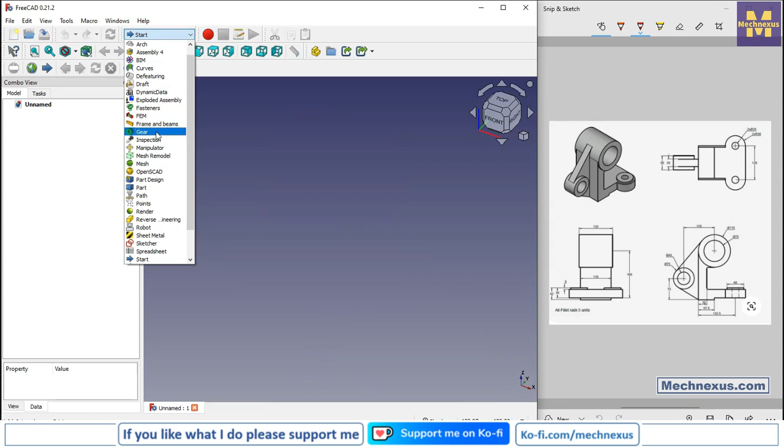So let's come back to our tutorial. Here I have created a new file, and I will switch to the Part Design workbench, create a body, and then click on create sketch. The first thing I will do is create this circular profile.

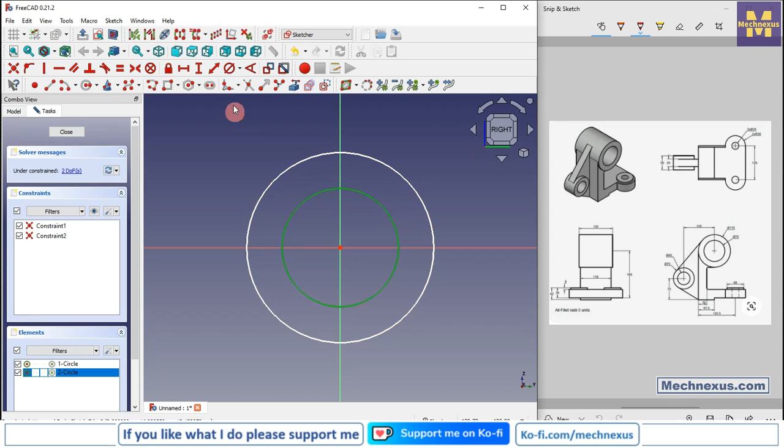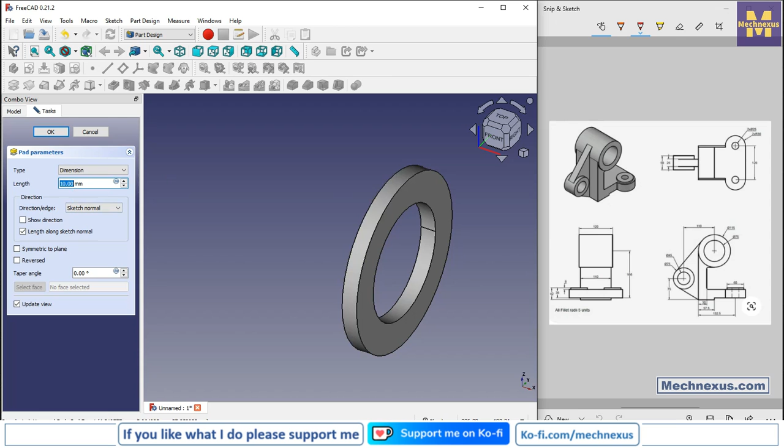For this I will select the right plane and create two circles. Select the circles and provide the dimensions: the inner one is 75, so select diameter and provide 75, and again select diameter and provide the outer one 115. Let's move the dimensions, and now I will close my profile and create an extrusion, providing a length of 120, symmetric to the plane, and click OK.

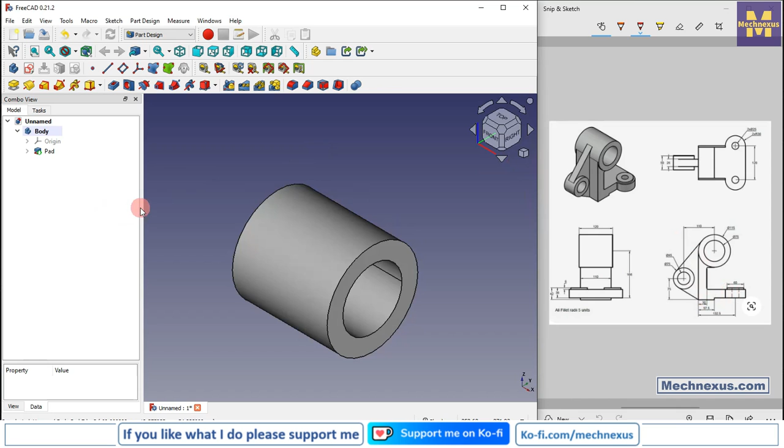Now we will create this L-shaped profile which we can see here in the side view. We will switch our model to isometric, turn on visibility, select the right plane, select this mid plane, and click on sketch. We go to the model tab and hide the origin plane, then switch to wireframe view.

The first thing we will do is project the outer diameter, and here I will create an L-shaped profile. I will delete this, and again create a rectangle, and delete these two lines.

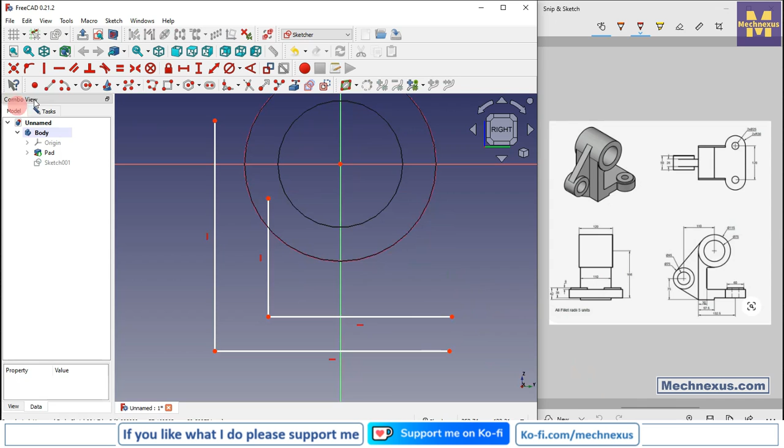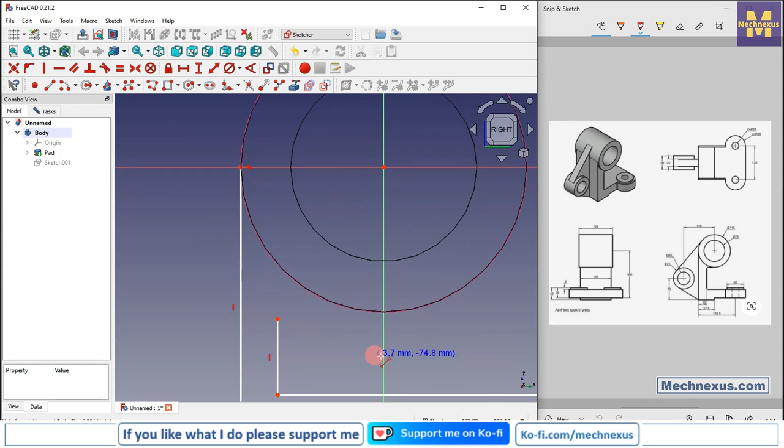Now I will select the line tool, create a vertical line and make it vertical. Here I will select this and this, move it a little bit, select this and this, and add a tangency. Select the trim tool and trim it, and here I will create a line.

Let's see what is the conflict, and delete it. I will create a line, and now make this line tangent. Use the trim tool to trim it, and now give the dimensions.

Delete it. Here we are seeing the vertical constraint, so we will select vertical and set it to 172. Select this horizontal and give it 150.5, and select this and provide a dimension of 42, which we can see here.

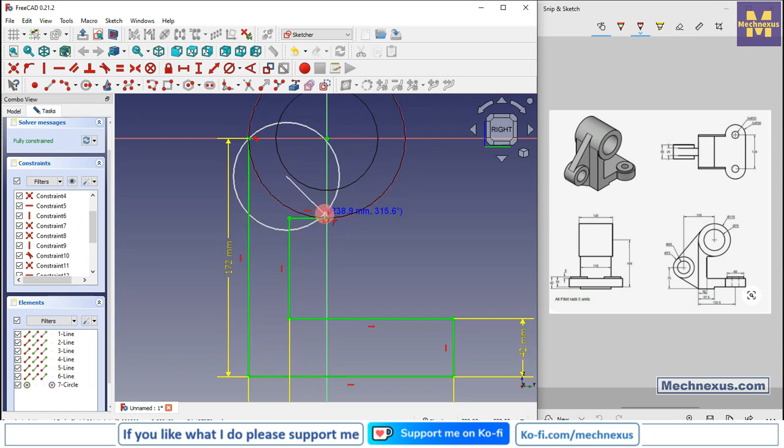We will select this point and this point and add a horizontal dimension of 30. Here we will create a 3-point arc which will be equal to our projected diameter, and select this to make it equal.

So this is our fully constrained profile, and we will extrude it to a distance of 110. We come out of the sketch, press V7 for shaded view, select the sketch and click extrude, provide the distance of 110, keep it symmetric to the plane, and click OK.

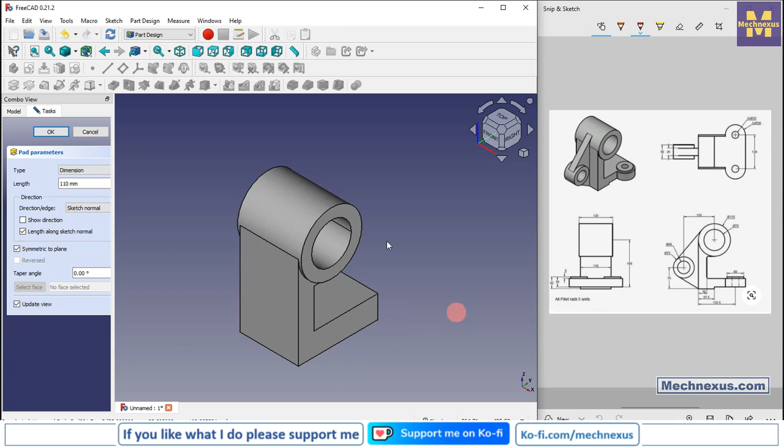Now we will create this half circle. I will select the face and click on sketch, switch to isometric, click project geometry, go to top view, and switch to wireframe.

We will create a 3-point arc, select this point and this line and add a coincidence, select radius and provide a radius of 36, and now select the line and close the profile.

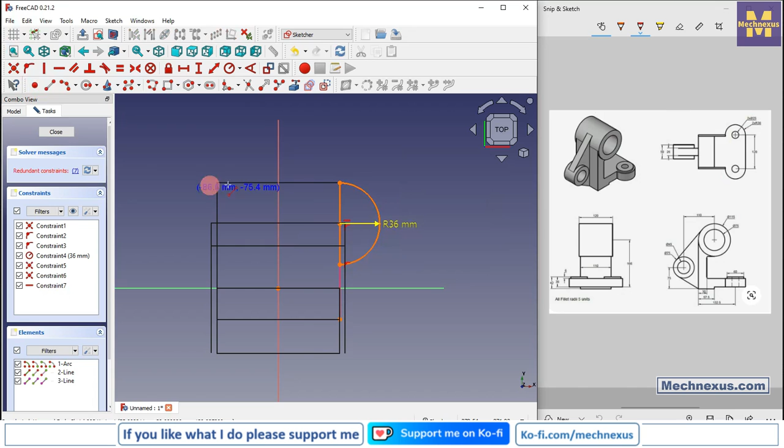Here we will delete this conflict constraint, close it, and press V7 for shaded view. You can see all the shortcuts here - for flat line it's V7. We select the sketch and click extrude. From here we select reverse, then select up to face, and select this bottom face.

Now this and this seem to be separate solids, so we will refine the shape by clicking last features and setting refine to true. Now we will mirror this on the other side by clicking mirror, then select reference, select this mid plane, and click OK. This mirror feature also seems to be a separate solid, so we refine it, setting it to true. Now you can see these two have been successfully merged.

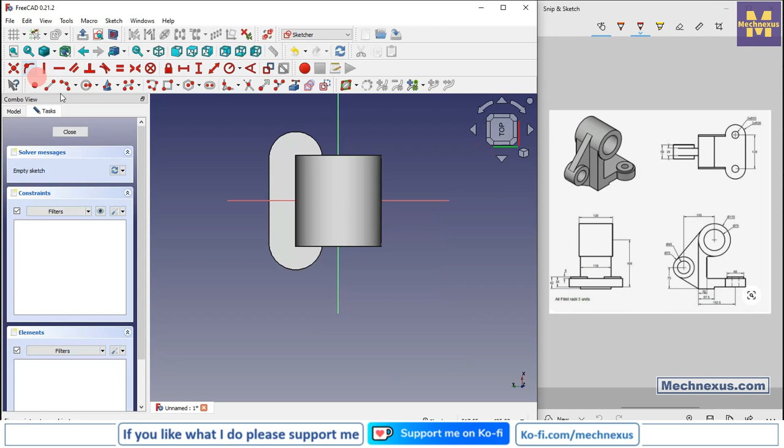Now we will create these two bosses. We switch to isometric, select the face, click on sketch, switch to isometric, click project geometry, and project it - this is a diameter of 60, which we can see here. We go to top view, switch to wireframe, click circles, create a circle, go to diameter and provide 60, then click OK.

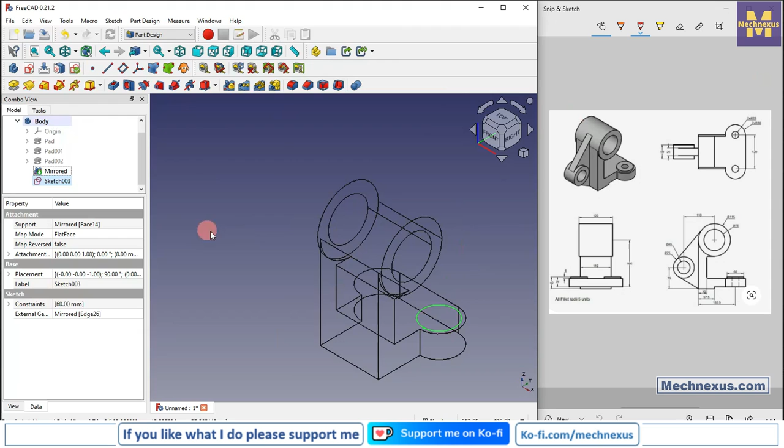We will also create on the other side, click on project geometry, create a circle, and make this and this equal, click on close, press V7, select the sketch, click on extrude, and this is the extrusion of 6 mm, click on OK.

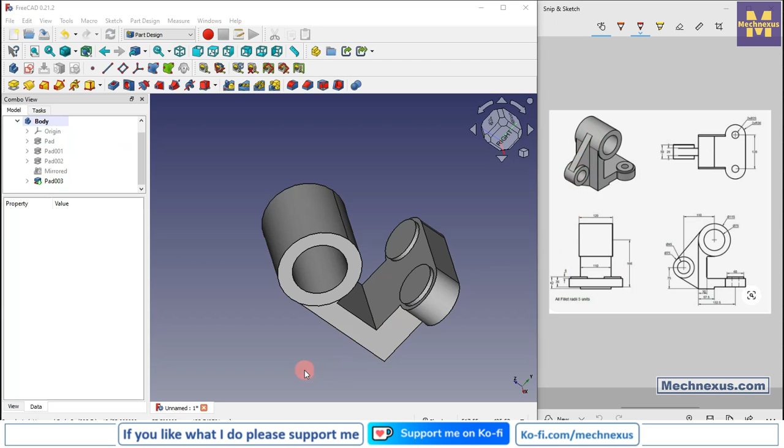Now we will create this rib. For this we will select our mid plane, so we will select the origin plane and press spacebar, select the sketch, switch to the model tab and toggle the visibility, switch to the wireframe and click on project geometry, project it.

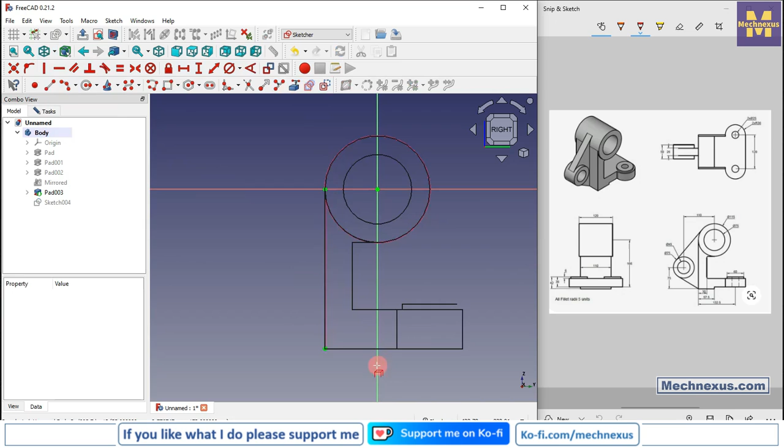We will select the line tool and create a line, select a fillet and provide the fillet here, select this arc and this line and provide the tangency, select the trim tool to trim it, and this is of diameter 75.

From this point to this point the distance is 75, and the horizontal dimension of the center from this to this is 110. Our sketch is fully constrained. The only thing remaining is our profile is not closed, so we will close it.

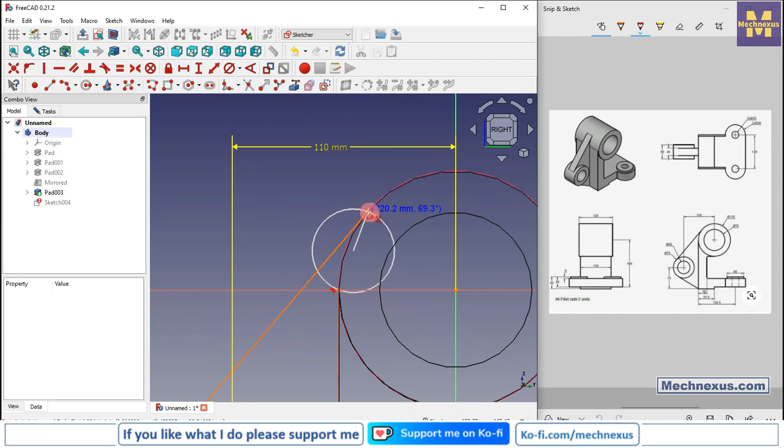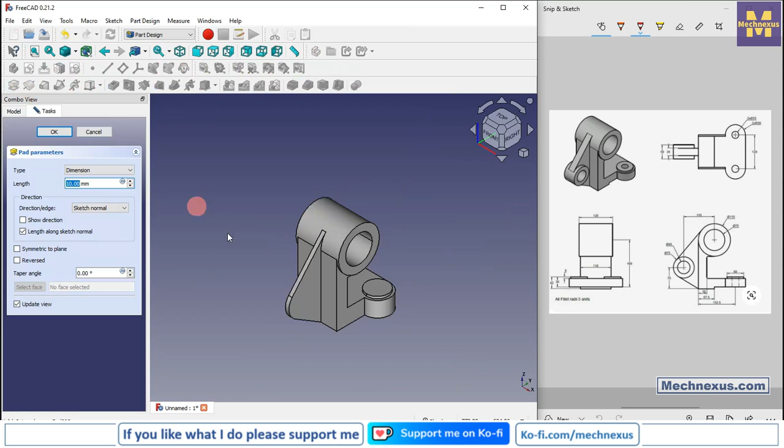Click on close, press V7 for the shaded view, select the sketch, click on extrude, and this is of 26 mm thickness, and from here we will select symmetric to the plane and click on OK.

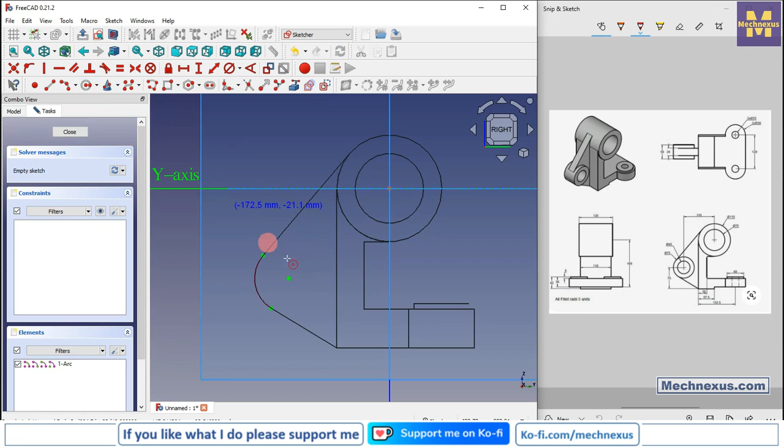Now we wanted to create this circular profile, so on our plane we again select the right plane and click on the sketch, switch to the wireframe and click on project geometry, select the circle tool and create an equal circle, and we will extrude it to a distance of 50 mm.

First we will turn off the origin plane, press spacebar and press V7 for the shaded view, select the sketch, click on extrude and provide the 50 mm, select symmetric to the plane, click on OK. Here we are seeing separate edges, so obviously we will refine our features, set refine to true.

Now we will create the hole. The first hole we will create here. We will select the face and click on the sketch, click on project geometry, select the circle and create a circle of 45, select diameter and provide it 45, click on close, select the sketch, click on extrude, and from here say through all, say OK.

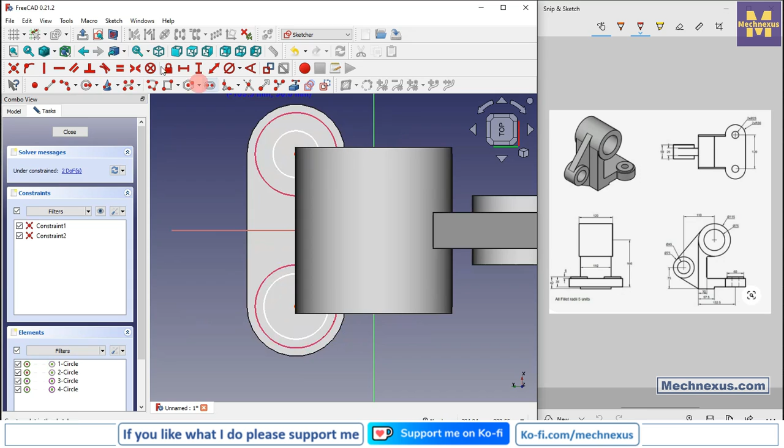Now we will create these two holes. For this we will select the face and click on the sketch, click on project geometry and create a circle of 25 mm. If you are facing any difficulty switch to the wireframe view, select diameter and provide a diameter of 25, select this and make it equal, click on close, press V7, select sketch, click on extrude and from here say through all.

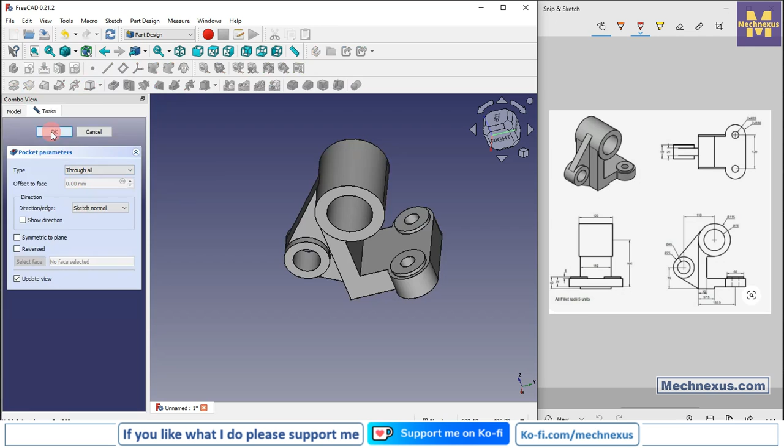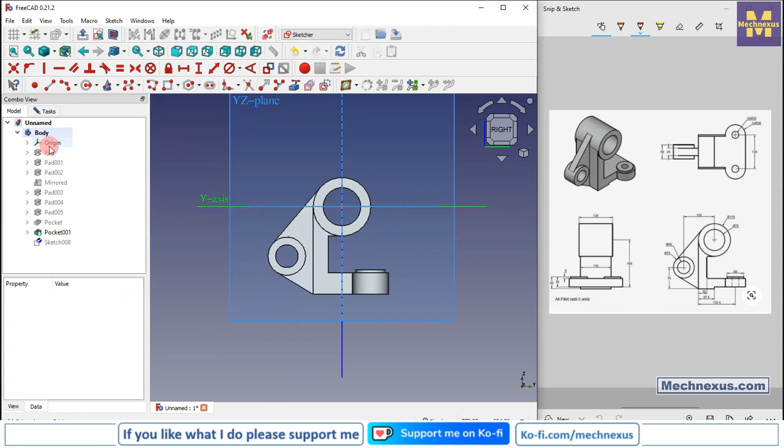Now press 0 for isometric, and here we have a cut at the bottom side. For this we will go on our origin plane, again select the right plane, click on the sketch, switch to the wireframe, click on project geometry and project these two edges, and create a rectangle, select it and provide the vertical dimension of 6 mm.

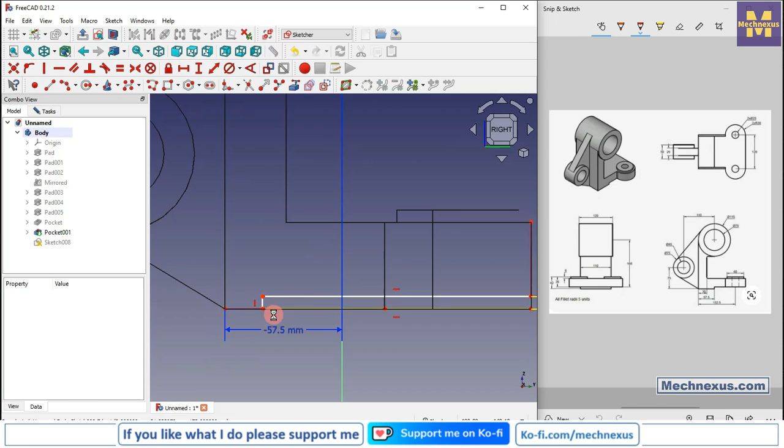We will also project this edge, select this point and provide the horizontal dimension, select this and this, and this is of 57.5, click on close, press V7.

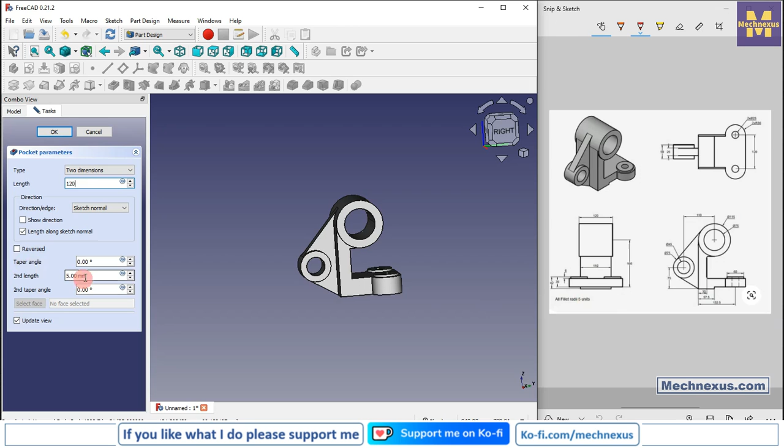Select sketch, click on extrude cut, and from here select 2 dimension and set it to through all, symmetric to the plane. You can see that you can also use the two dimensions to provide two values, let's see, I provide 120 and 120, or we can use through all as well.

Now press 0. So this is how we have successfully converted this orthographic drawing into the 3D model, and you can see that we have successfully done it.